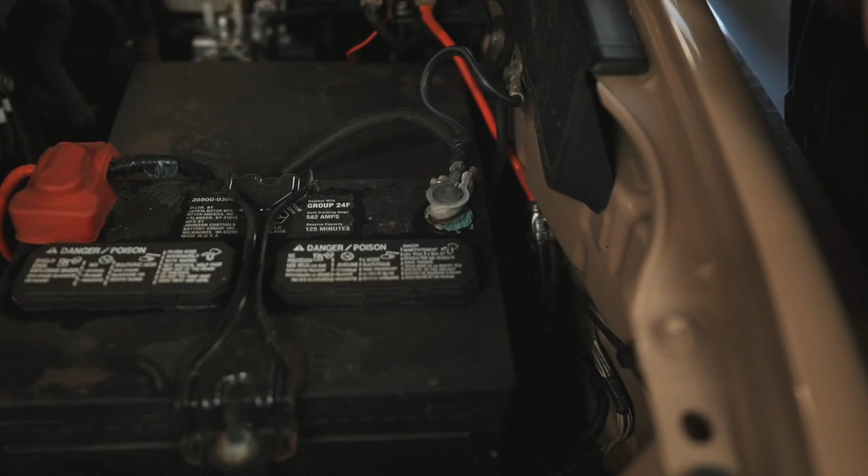First step, we are going to be disconnecting the negative cable. We'll just loosen that with a 10mm and then pop that off. We'll set it down to the side so it doesn't come back and reattach itself.

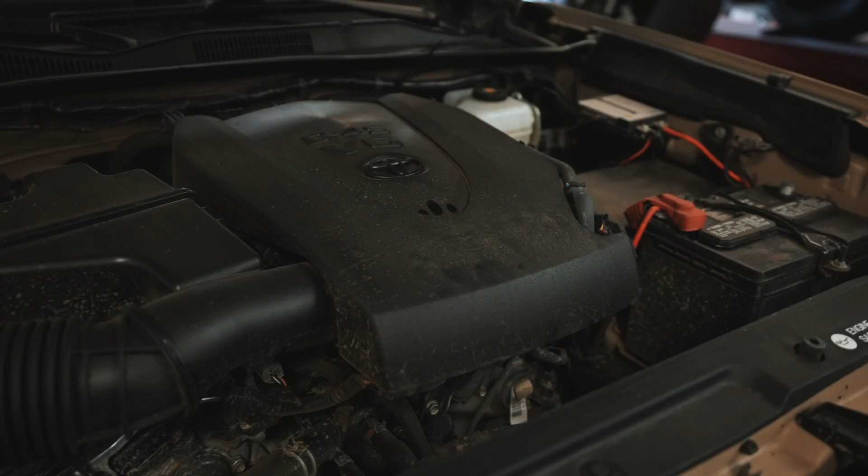Next, we're going to be taking off this engine cover. Just lift it up from the front, and we're going to remove it from the engine bay.

Next, we're going to be disconnecting the mass airflow sensor, and then we're going to be unhooking the wiring harness from the air filter housing, so that way we have full access to take this out.

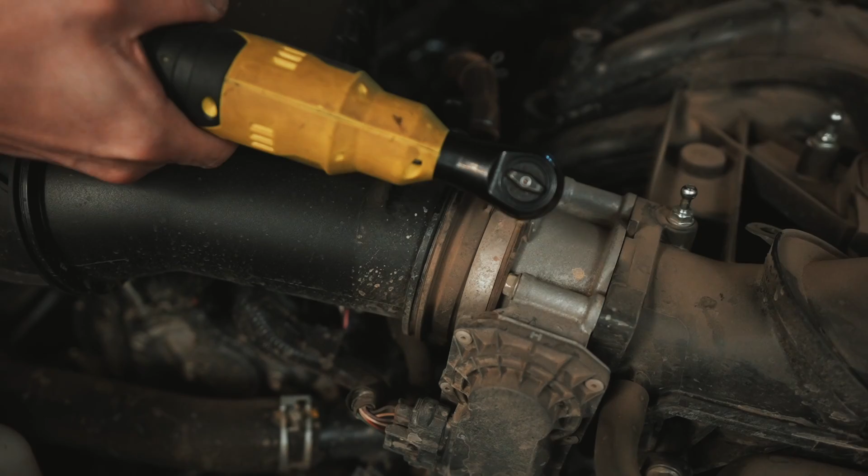Next, we are going to be disconnecting the vent line here, which is attached to the intake tube, and then we're going to loosen the clamps, this one here with an 8mm, and this other one over here, which is also an 8mm.

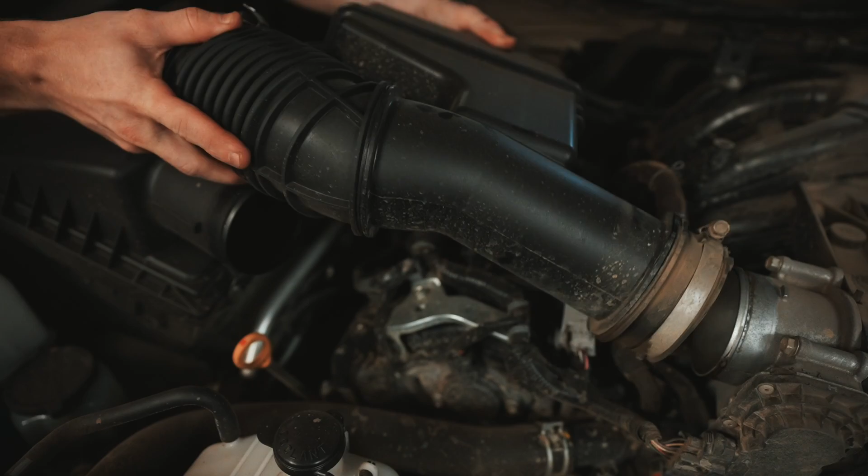Then we're going to be removing this whole tube from the engine bay. If there is the harness still attached, go ahead and squeeze that - it's going to be underneath this part here. So what we'll need is this pair of needle nose pliers, squeeze that and push it through. Then we can take this part out.

Next, we're going to be taking 2 bolts down here, but this truck has its bumper cut, so we're going to show you guys on this vehicle here. The 2 bolts are going to be right there and at the very corner right here. We're going to loosen those 2 out, so that we have access to underneath there.

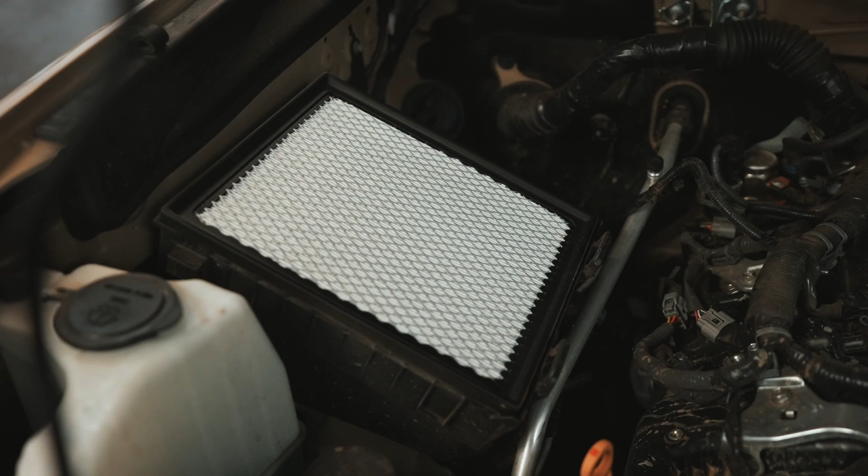Next, we're going to be taking off these clips, that way we can take the lid off. Then we're going to be removing the air filter as well, so we're going to pull that out.

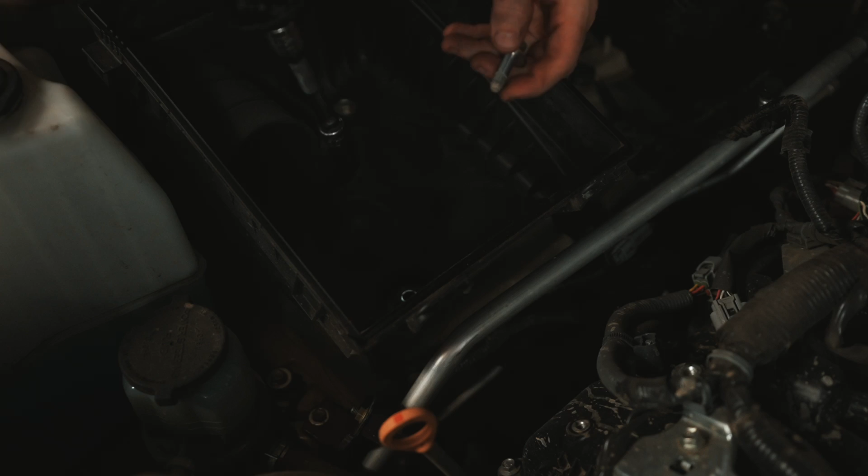Next step, we're going to be removing these 3 bolts from the bottom filter, and they're going to be 12mm. So these are the holes that those bolts were in - 2 of them were inside the housing, and the last one is just on the outside of it, closer to the firewall.

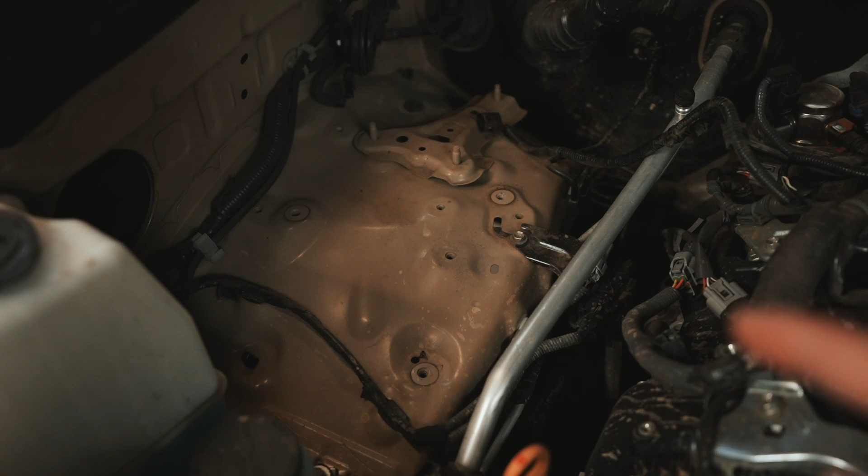Next, if you guys have mud flaps, you're going to be taking that off of there, but since we don't, we skip this step.

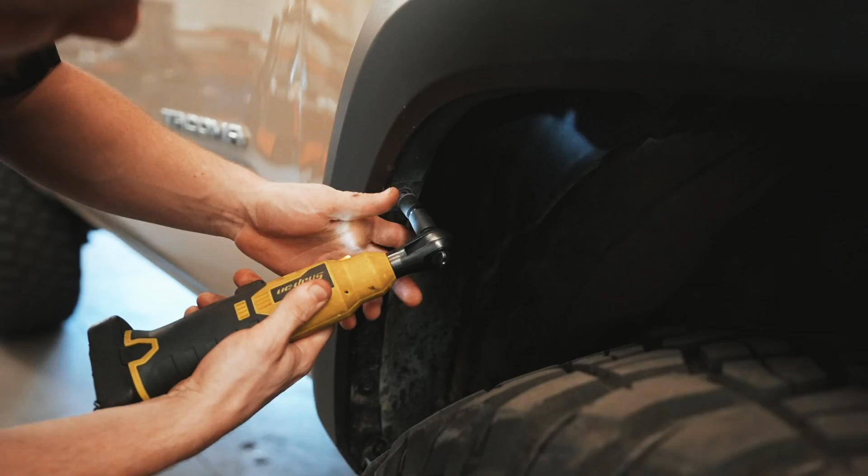Next step here, if you guys have a TRD Sport, TRD Off-Road, TRD Pro, you guys will have the fender flares. Some SR5s will have it too, but what we're going to do is take off these 10mm bolts that are underneath the fender flare.

Next, we're going to be pulling the fender flare back, and since Patrick doesn't have his fender liners underneath, it makes it a little bit easier for us.

So back behind the fender flare, there are a couple tabs that you need to pinch and pull back. There's this front black one, and then the rest are these blue and orange clips. If you do end up breaking any of them, the nice thing about this kit is they do provide replacements for all of them.

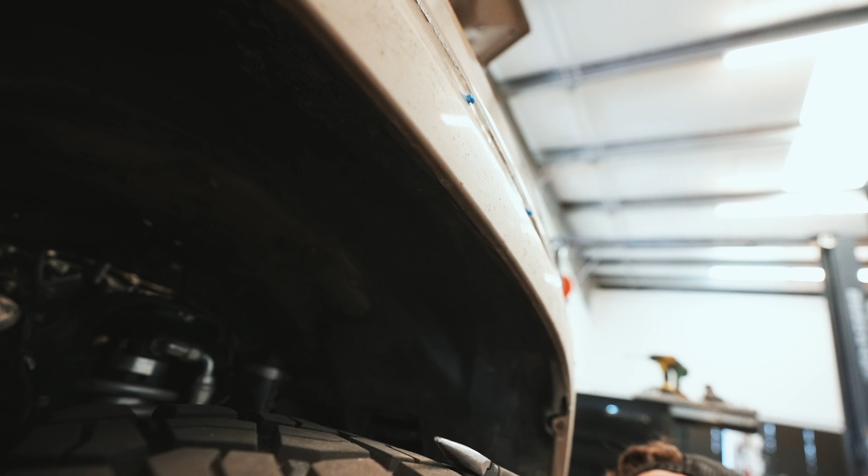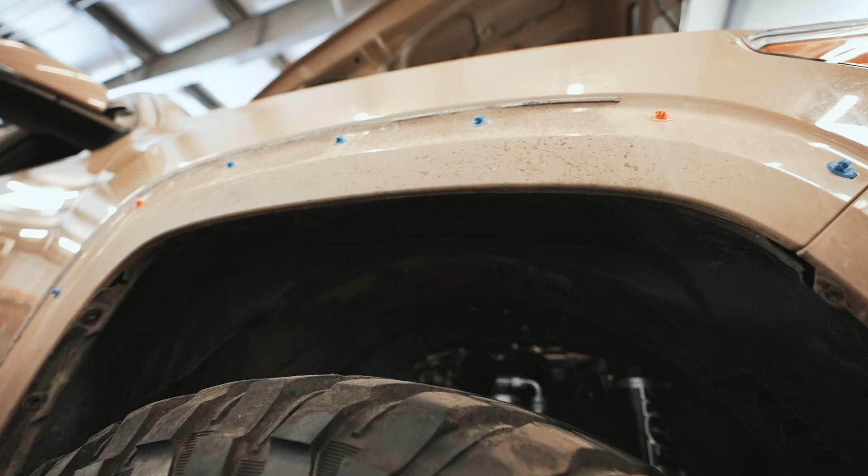Next step, we're going to have to take 2 screws out, but it doesn't look like Patrick has them to begin with. So we're just going to cut those 2 with side cutters - get right underneath them, cut them, and push them through, and those will fall out a little bit later. Once you have those 2 out, we won't need those again, and they do come with replacements so we can put the liner back in later.

So this is the template we're going to be using. It shows the fender, the hood edge, the body line, and all of that.

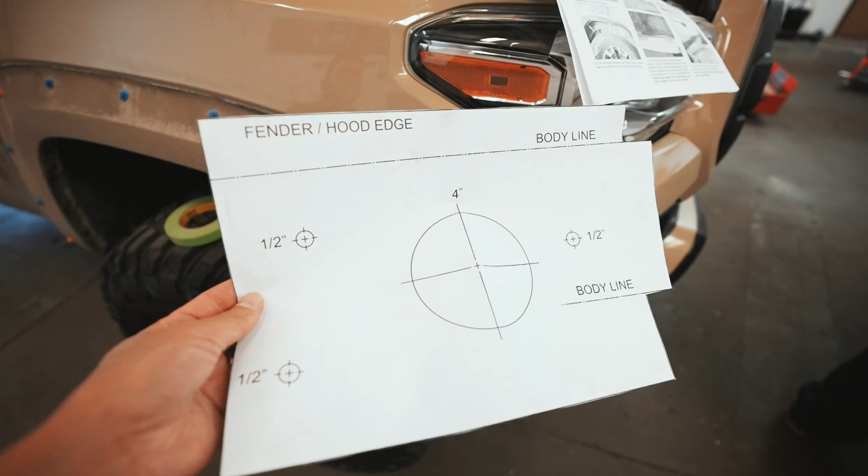So what we're going to do is cut this along the line and then line it up with the hood. We just realized our template is a little bit messed up because they printed it on the back of the other template.

So what we're going to do is put this side where it says Fender and line the hood edge up on the hood edge. We're just going to use this line where we're supposed to cut and mark it down here, so that way we know where to start.

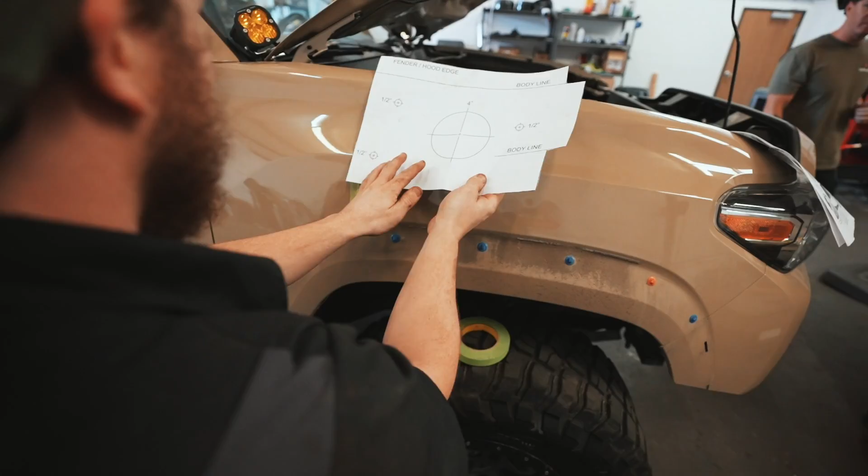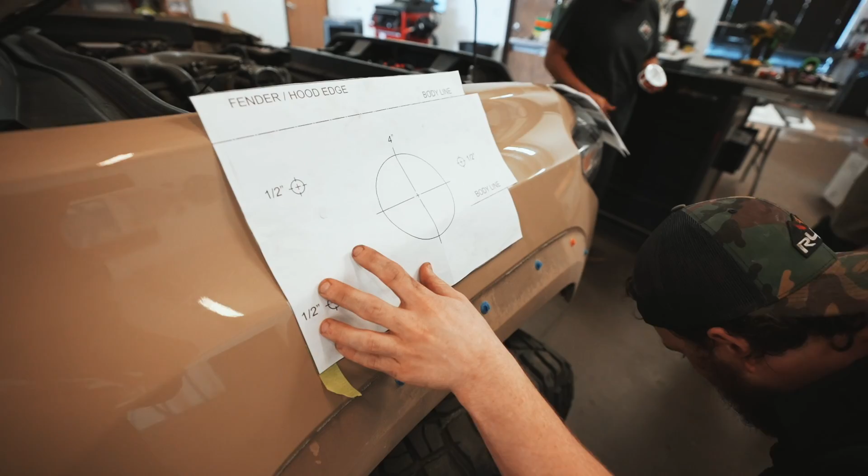And then we'll flip it over to the other template, line it up with the other line, the fender and hood edge and the body lines right there and there. Then we're going to tape this one down because this is the one we're actually going to be drilling from.

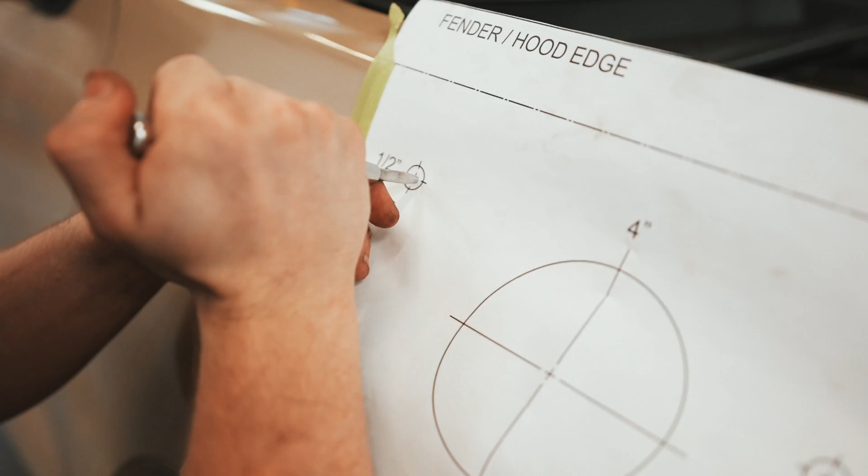Next step, we're going to use a center punch tool. We're going to mark the 3 holes that are on here, and then the very middle. There we go. So we're going to use that as the guide to drill these holes out to the half-inch holes that we need.

Once you have those holes punched, you can go ahead and take the template off. So what we're doing now is drilling a 1/8-inch pilot hole through each of the center punch holes we did. Next, we're going to drill the 3 outer holes to a half-inch size, then do the center hole with a 4-inch hole saw.

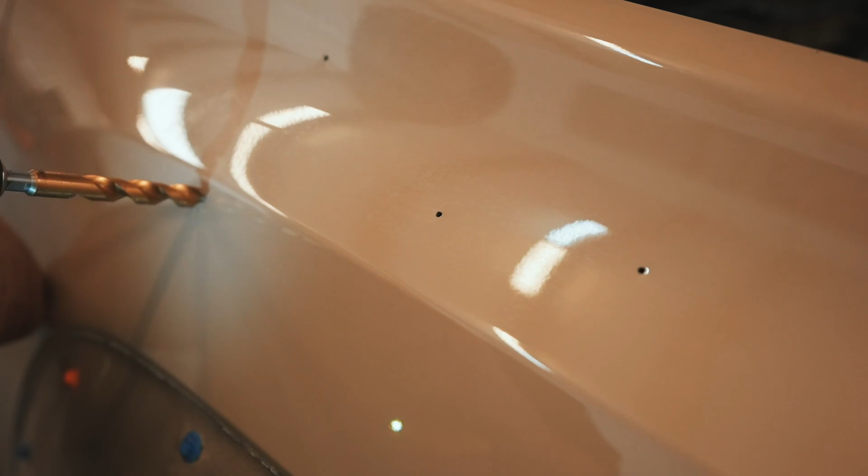Alright, so what we're going to be doing now is using our 4-inch hole saw with our 1/8-inch pilot drill into the pilot hole that we drilled. We're just going to knock it down.

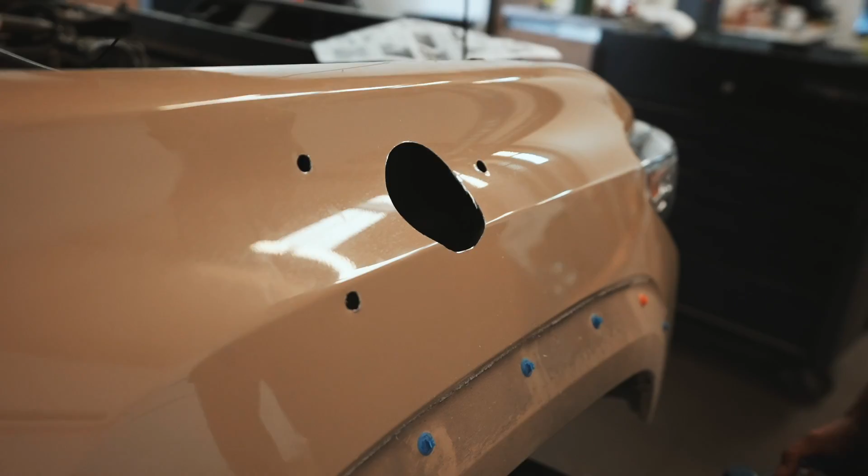Ta-da! Very nice, clean hole. So this step isn't needed, but we're just going around cleaning it up a little bit, making sure there's no sharp edges and everything is nice.

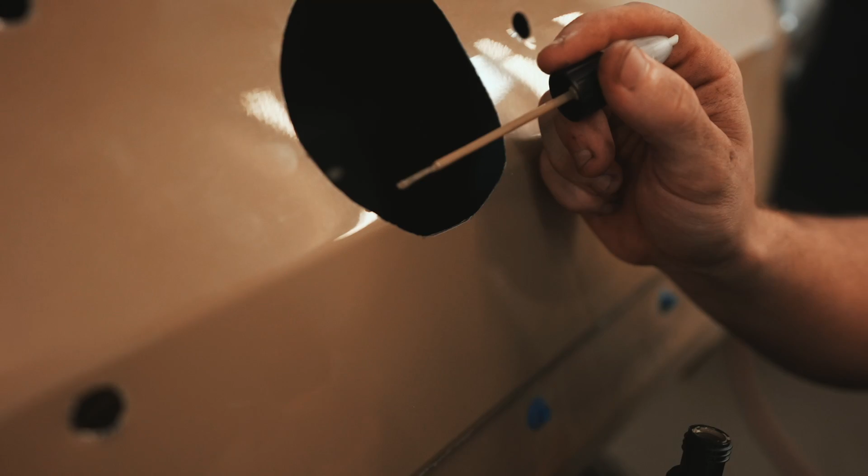Alright, since we have the hole cut down to the metal, what we're going to do now is apply a little bit of touch-up paint. Luckily we've got pretty much every color here, so we're applying a little bit of quicksand touch-up paint to the inside where it's down to bare metal. That way it prevents as much rust or corrosion as possible.

Next, we're going to be working on the roof here. You'll have this weather strip that we will just pry like that and move it out of the way, so we're not completely taking it off. On the bottom it just has a little bit of double-sided tape, and what we're doing now is cutting into this factory tape, which will allow us access to the nut underneath it.

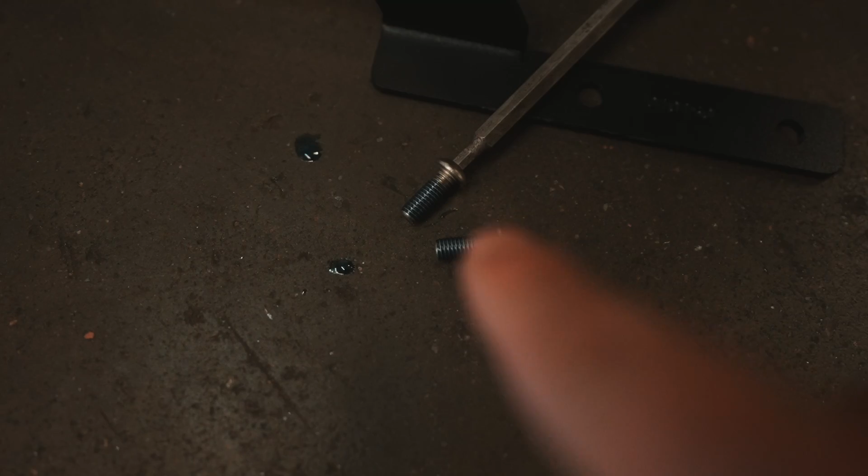Next step, we're going to apply some thread locker to the provided hardware. We've got some on there already, so we're getting ready to install this bracket on the roof. We'll bring that up, thread it into the holes we punched out earlier with our razor, and then tighten it down all the way. If we need to later, we can loosen it and adjust.

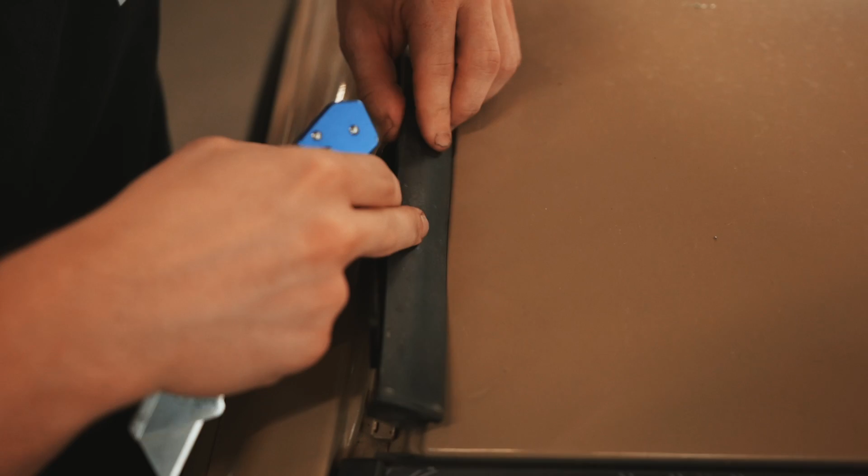Next, we're laying the weather strip back down with a razor out. We're just notching a little part of it so the weather strip can still lay down completely flat once it's back in place. So this is what ours looks like after we notched it out, so the weather strip can lay flat just like it did before.

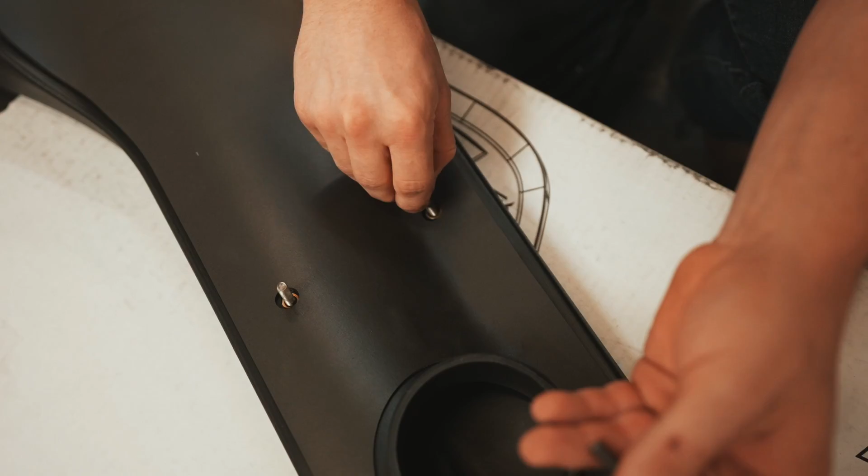Next, we're peeling off the paper backing on the foam piece and applying it right onto the back side of the snorkel. There are 3 pre-drilled holes, and we're making sure all the nut serts show through it, then laying that all the way down to make good contact. Next, we're applying these studs onto the nut serts on the back of the snorkel, threading them all the way down until they stop on all 3.

Now we're moving the snorkel onto the fender. Put the hole in, line everything up with the fender side, and then come up here where we installed the mounting bracket. Now line up the bracket with the snorkel — there are nut serts in that as well — and line that up and install the provided hardware.

Next, we pulled back the fender liner so we can get to those studs we installed on the bottom of the snorkel. We're going to use these rubber washers along with the metal ones, and then 3 nuts.

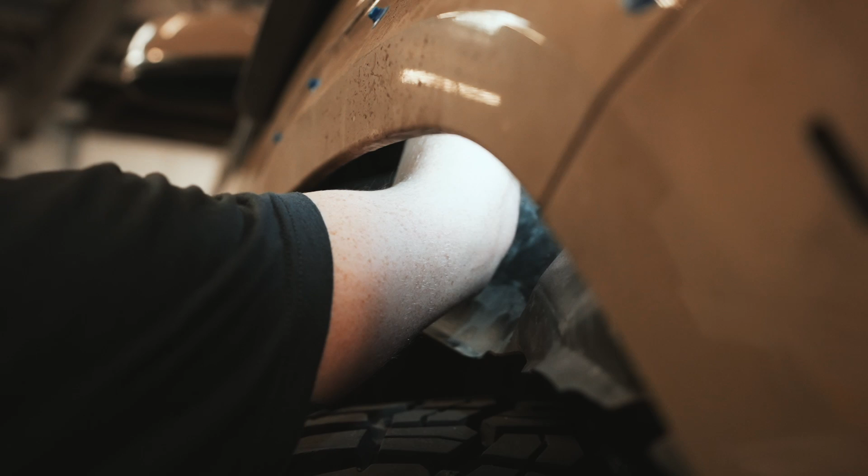So we're going to install the rubber washers first, followed by the metal, and then the nut. It's gonna be hard to see up there, but you guys saw the studs, what they look like from the back of that. So just reach up in there, put the rubber washer in, this metal one, and then the nut, and then just go ahead and tighten them all the way down.

Alright, so you guys can kind of see what it looks like in there now. So the bottom two we're going to be able to get with a socket, but the top one we'll probably have to use a wrench for that one. So we'll go ahead and tighten it down.

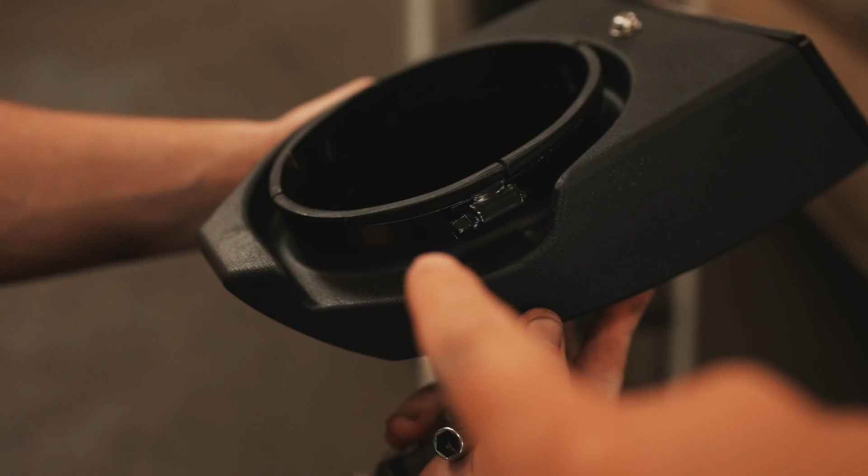Next, we install this clamp onto the snorkel head, and what we're going to do is we're going to move this up to the top of the snorkel, and then we're going to set it right on there, just like that, and then we will go ahead and tighten that clamp just to make sure that it's fully secured.

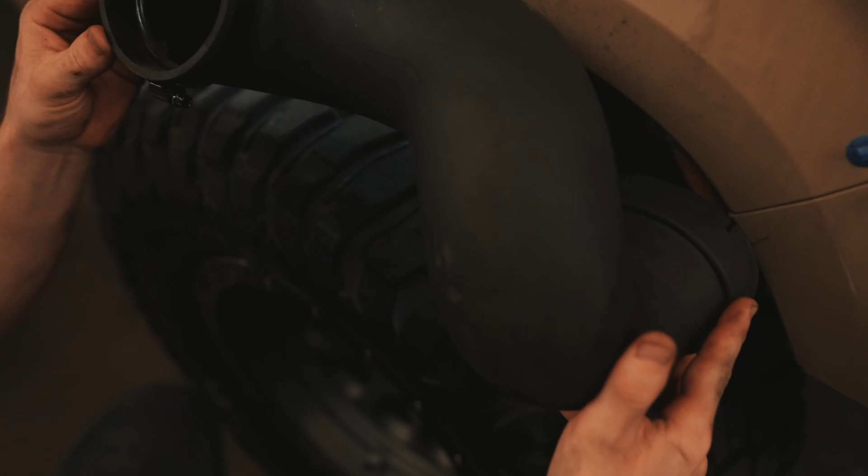Next, we're going to be installing this flexible duct here. So we got a hose clamp already on the round side. This side is bigger and it's slightly oval. So we're going to go ahead and slide that in there.

We're going to fit that around the circle part that's on the back side of the snorkel here. And then on the other end, it's actually going to come out that hole right there, and that's gonna mate with the factory airbox. So we're just gonna adjust it until we get a good fitment, and then we'll tighten that clamp on the back side.

Now we are just putting all of the fender liner back in. Then we're going to be replacing any of these broken clips, and then these ones down here that we cut off with the side cutters, you can replace those. Those are also included. Once these are all replaced, the black clips are installed, you can go ahead and reinstall your fender flare.

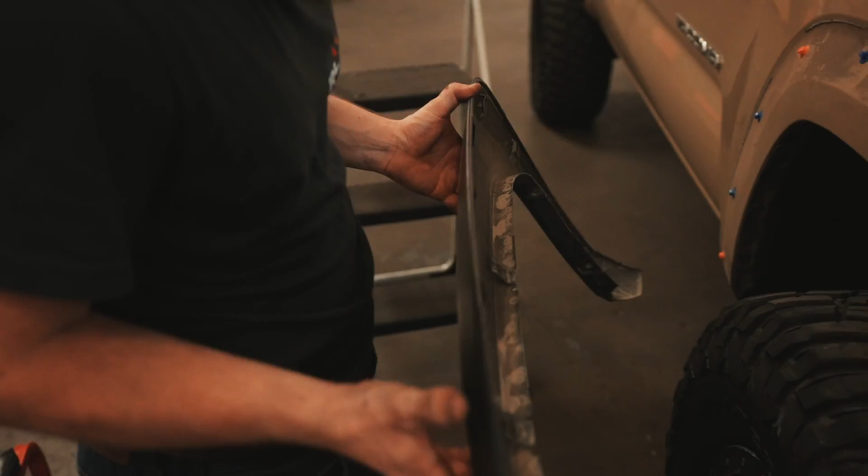And if you really want to, you could replace the tape that is on the top there. We're not going to, but you can, since Patrick didn't really want to do that. But if it was my truck and I want to close this gap up as tight as possible, I probably would replace that. But if we were doing this for a customer, we would replace that as well.

Lastly, install those bolts that are down here if you guys do not have the viper cut, but obviously we do, so we don't have to reinstall that. Next, we're going to be reinstalling the factory airbox, or the low part of it at least.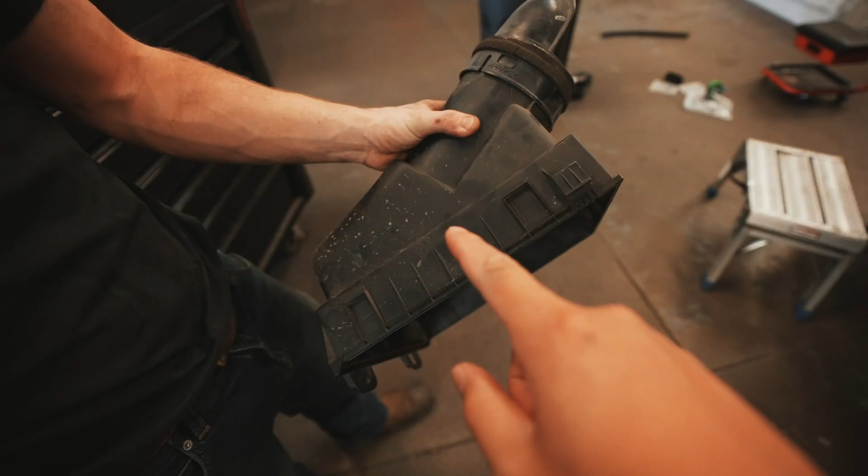What we're going to do is we're actually going to take this front part of it, take it off. We're just going to pry it from underneath on both sides. We're going to pop that off.

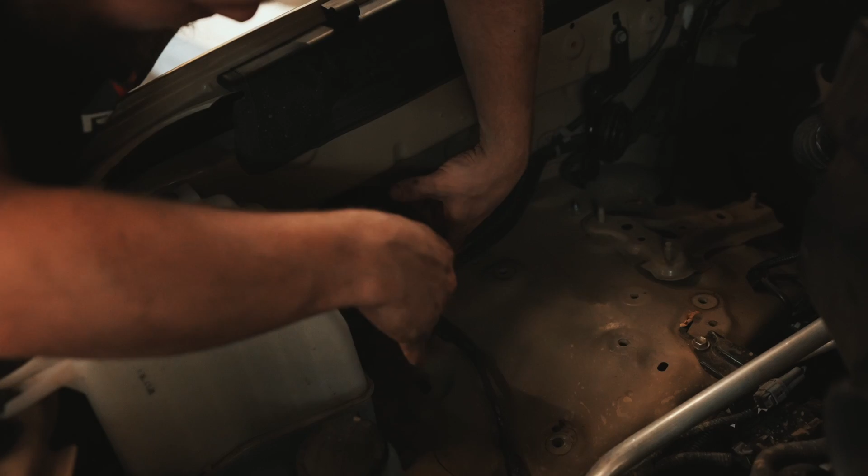Next, we're going to be installing the clamp that is provided onto that duct that is in the fender. Then we will move the lower portion of the factory box into that hole. Then go ahead and tighten that clamp.

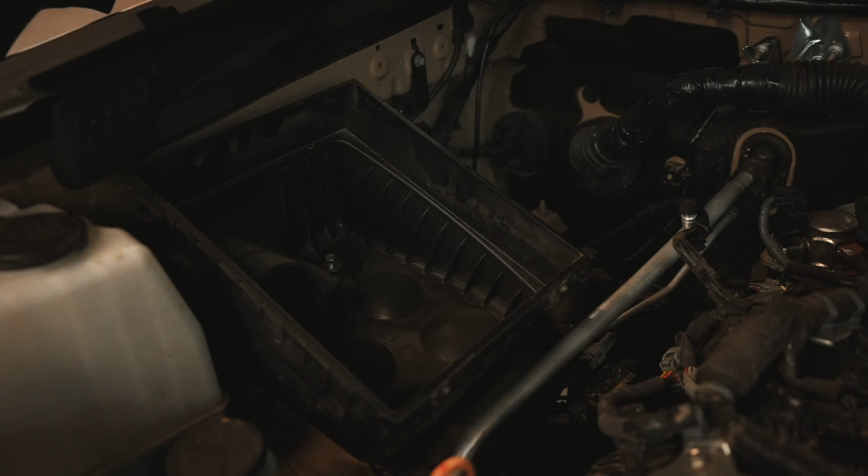In the instructions, it does say if you need to remove that washer fluid reservoir just to get easier access, you can do that as well. Then go ahead and install the factory bolts that hold down the bottom and tighten it all the way down.

Then go ahead and put the filter back in, and then the upper part of the housing. Then go ahead and reinstall the factory intake tube. Then go ahead and secure the clamps down.

Then go ahead and reconnect the vent line. Put the clamp on that.

Then back here for the harness, we will reconnect that part to the underside of this box here. It's kind of hard to see, but you have to unclip that at the beginning. So then go ahead and clamp that back on, plug the sensor back in. Lastly, we will put the cover back on, and then we are all done.

All right, so there we have it. The new Airaid Snorkel was installed. I really like how low profile it is and how it hugs the body real tight, and it stays narrow, and the head is adjustable, so in the weather or in the winter you can swap that around, or in the rain you can swap that around so it doesn't get all the water in there.